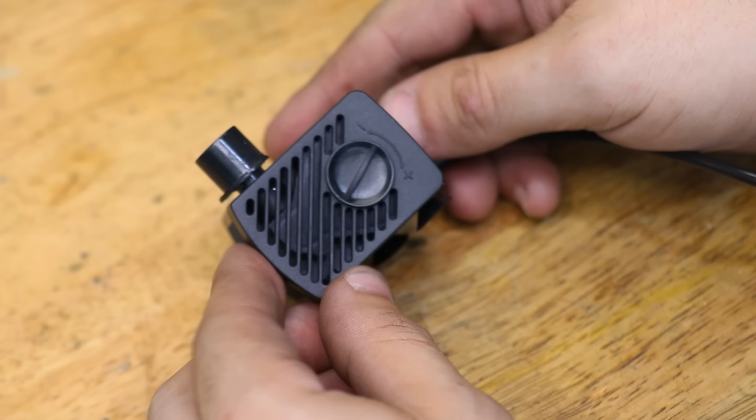So I'm currently in the market for a pump, an oil pump to be precise, and I know what you're going to say - isn't that a pump right there? One that's already good to go, already made, and doesn't need any machining. And the answer is yes, but A, that would be too easy, and also it's not really the correct type of pump for what I want.

What this is, is some type of centrifugal pump. Inside here there's going to be an impeller which spins very fast, and whilst this is great at getting high flow rates, they aren't really as suited for dealing with higher pressures, which is sort of what I'm looking at. I mean, nothing too big, but I don't think that this is the pump for the job.

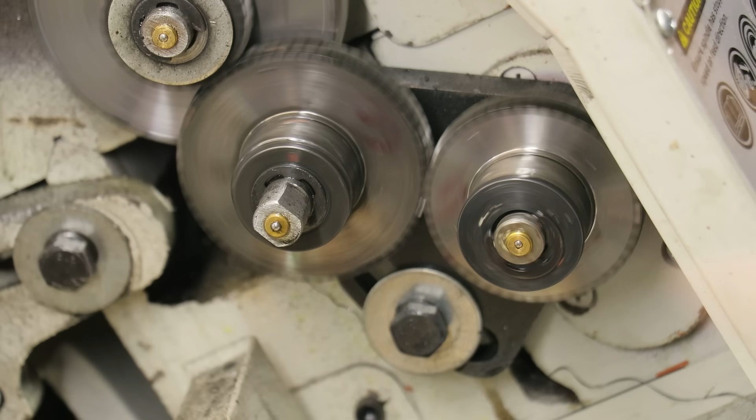Now of course this is not a pump, it's the gear train on the back of the lathe that connects the two gearboxes together. But with a bit of repackaging, this is pretty much the exact same setup as a pump, a gear pump. And if you weren't already aware of them, these pumps are incredibly common, especially in hydraulics. And for what I need, it really does tick all the boxes. It's good for moving thicker oils, which is what I'm going to be using this for.

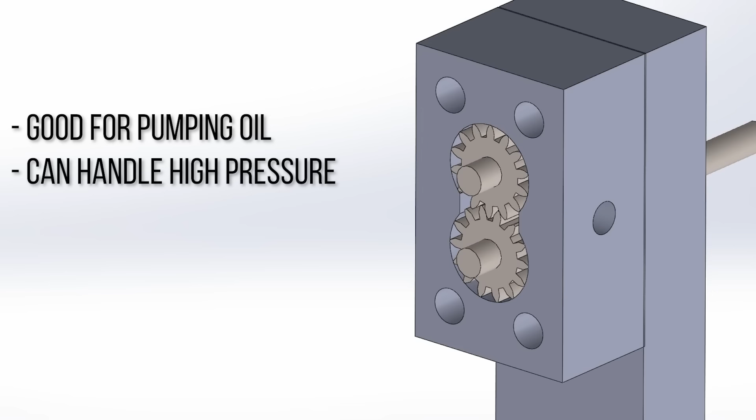They do well under pressure. They run on rotational motion, which is good for powering this, and they're relatively simple to make. And I really do mean it. I mean, pumps in general aren't that complicated, but this one here is pretty simple. It's effectively two gears seated in a pair of bushings inside a housing with an outlet and an inlet, plus some sort of way to drive one of the gears, which will in turn drive the other.

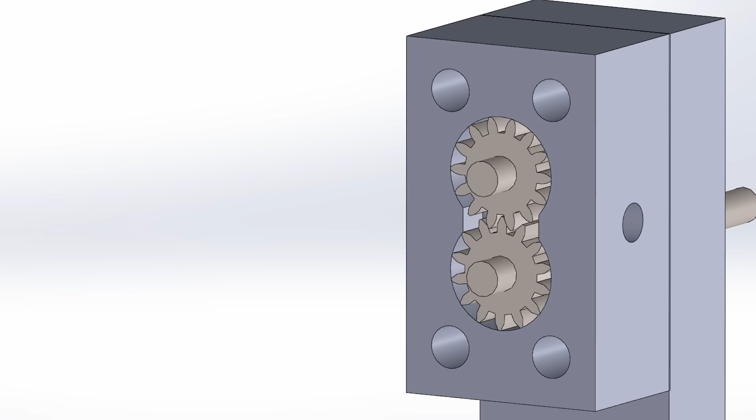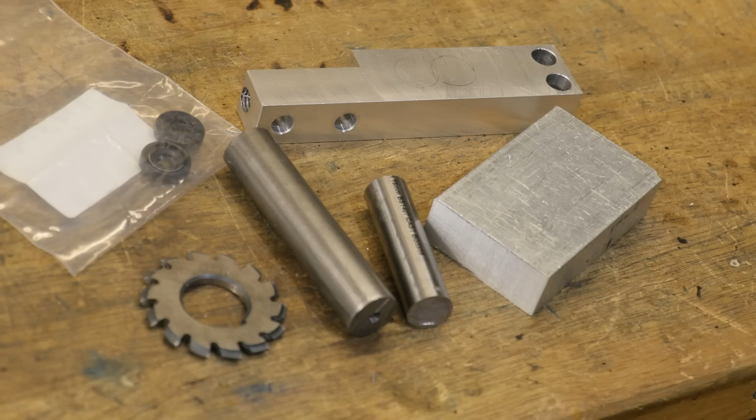I guess for me it's a little bit less straightforward because this is one of those projects where I would really benefit from having a CNC machine to make some of the parts, especially the bearing blocks, but unfortunately I just don't have one. So that's one thing I will have to worry about, but in general they are pretty simple to make. Now in terms of materials and tools, I'm kind of working with what I got, which here really isn't a lot.

I've got some aluminium offcuts which will serve as the pump housing, and in a perfect world these would have been a little bit thicker. If they were, I could have done this in two sections, just a top and a bottom, but instead I am going to have to do this in three. Which should be okay, we should be able to make it work, but it's more of a chance for things not to align correctly, and more of a chance for it to leak.

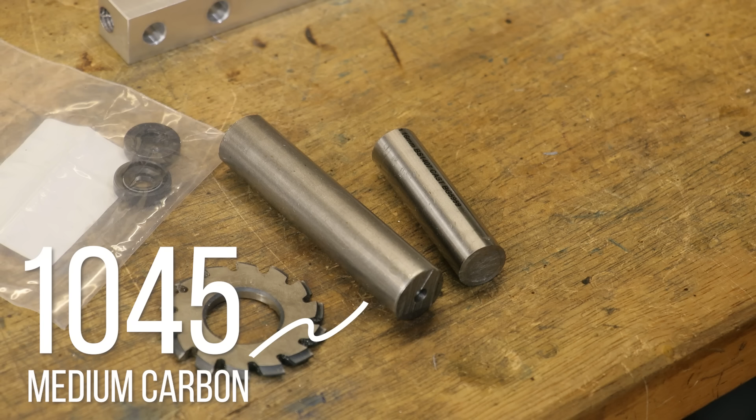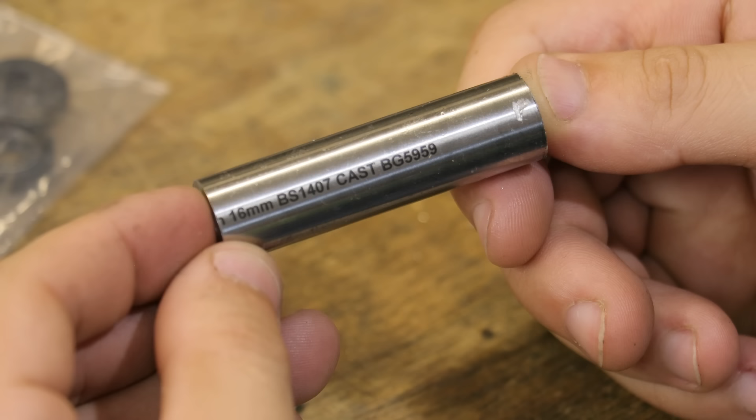Now for the gears and the parts that are going to receive a bit of wear, I'm going to instead make them from steel - 1045 medium carbon for the gears, and high carbon tool steel for the plain bearings and the wear surfaces. I will say ahead of time that I would have rather used bronze or maybe a PTFE bushing, but I think steel should be okay, plus I already had it on hand. It also helps here that this is precision ground, which will be pretty useful further on in the build.

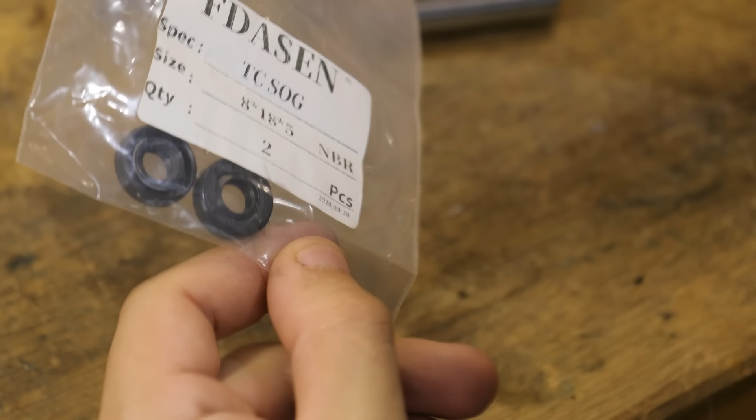I also have a 14 to 16 teeth gear cutter because the gears that I'm going to be making are pretty small, and most importantly I have a set of shaft lip seals. As you can probably imagine, one of the gears needs a drive shaft that sticks all the way through the housing so I can drive it, and the lip seal should prevent any oil from leaking out.

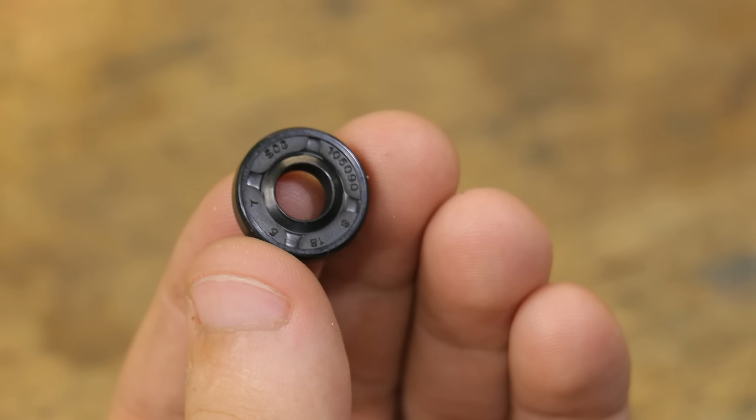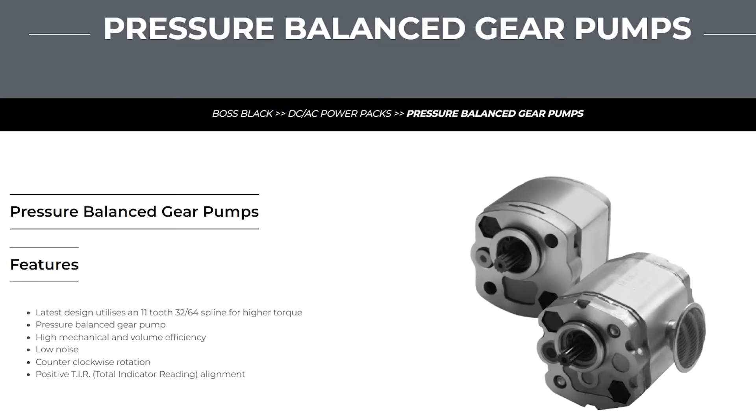These should be good to about 10 bar of pressure, and thankfully, whilst we are going to receive a bit of pressure, it's not going to be anywhere near that. At most, I think we should get about 20 to 30 psi. Although with that said, these pumps, or at least a properly designed one, should be able to handle anywhere from 2 to 3000 psi, which is why you commonly find them on hydraulic systems.

Although it needs to be said that pumps that are intended for that need internal seals on the bearing blocks, and also need pressure relief channels for diverting fluid to avoid overpressurizing the pump and causing damage.

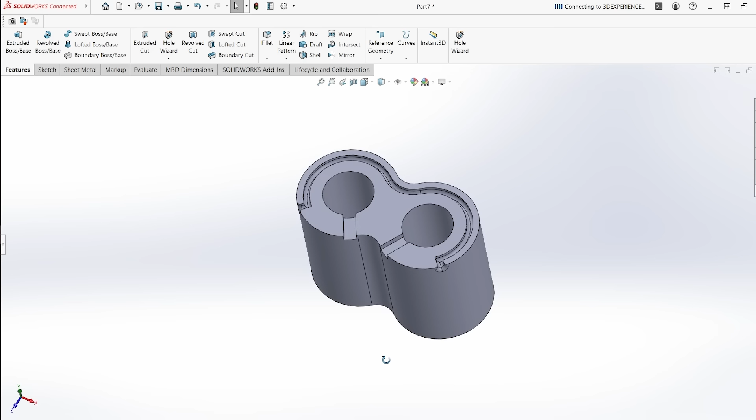Mine obviously isn't going to have anything like that because we aren't going to see anything close to those sort of pressures. So if you've opened one of these before and you're wondering why mine won't look exactly the same as yours, that's probably why.

For what it's worth, I can say up front that with this project I can take it easy, because with this pump, flow rate and efficiency really don't matter a whole lot. All I really need is a pump that works and doesn't leak. In fact, apart from a few documents and reference material, I was kind of making up the exact dimensions as I went along, so don't expect this to be optimal in any way because it really wasn't. With that said though, precision is going to be important here, and no matter the dimension, the parts will need to be made extremely accurately.

So let's jump in and let's get it made. The first thing we'll tackle are the gears. They're going to be made the same size as the bushings, so they're each going to get 14 teeth, which will equal 16mm OD.

I'll take the steel down to 16mm and also make a small shaft on the end, which will locate into the bushing. With the first side now roughed out, I'll get it out of the lathe and into the dividing head to cut the gear teeth.

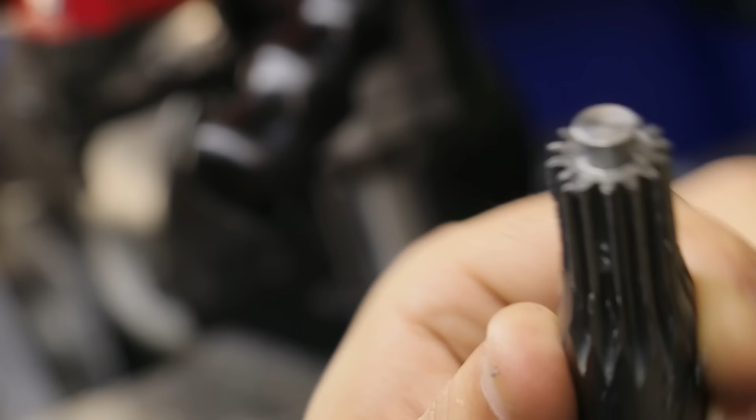And that came out looking pretty good. I'll then get it back in the lathe and part it off, so I can then flip it, clean it up, and then machine the shaft on the other side.

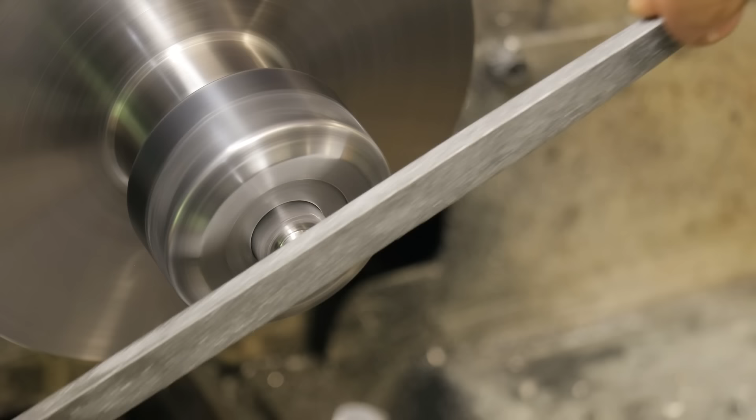And that is the first gear now done. This is going to be the driven gear. Now the driving gear is going to be made the exact same way, although it does need a longer shaft to be made on one side, and that'll be so I can connect it to a pulley.

And those are the two gears now done. I now start to work on the plain bearings, which is relatively straightforward, since the outside is already precision ground to the size that I need. So all I really need to do now is drill the inside to 19/64 of an inch, which is a bit over 7.5mm, and then ream it to 8mm.

I'll then come and part them off a bit over 5mm long, and then I can take them down to the correct size later on. And that's 1, 2, 3, and 4. They have a really good fit on the gear shafts, and this is roughly how they'll look once they're assembled.

Now, as you can probably see, the high carbon steel bushings and the outside of the gears are going to be our main wear surfaces. And whilst all these parts can be hardened, whether or not I do harden them is going to be up in the air, because the truth is I don't expect them to see a whole lot of load or wear during use, mostly because we're only moving a small amount of oil, which shouldn't take a whole lot of force, and when this is in use it's going to be flooded with oil, so I can't imagine it's going to be experiencing a whole lot of wear.

But if I really need to, I can always harden it at a later date. With that said, they're still not done yet. Parting them off left a pretty big burr, and that needs to be removed. They also need 1mm taken off one side to form a flat, and this will move the gears closer to each other so they can mesh.

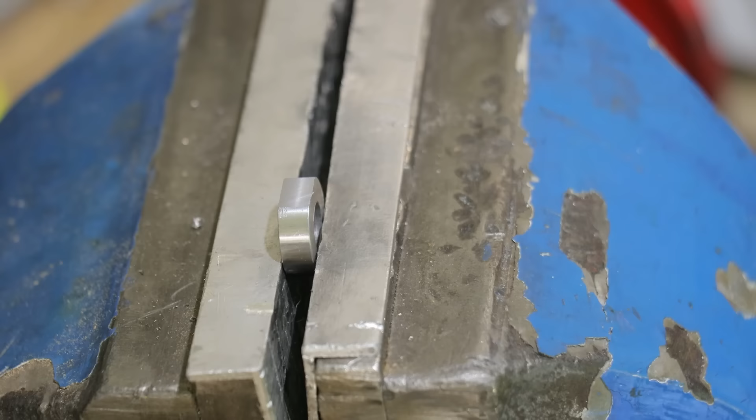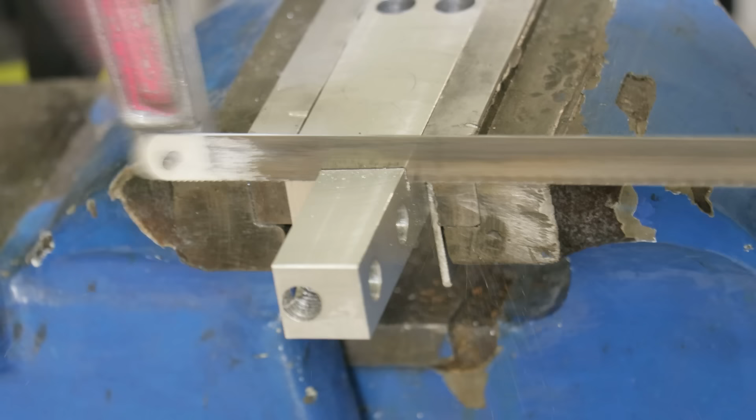Now this should give you a pretty good idea of how they're going to sit in the housing. As you can probably see, this is a pretty good substitute for a bearing block when you don't have access to a CNC or a rotary table. So with the gears and the bushings now done, let's start on the housings. Again, it's all aluminium offcuts, so I'll first get them cut down and then cleaned up.

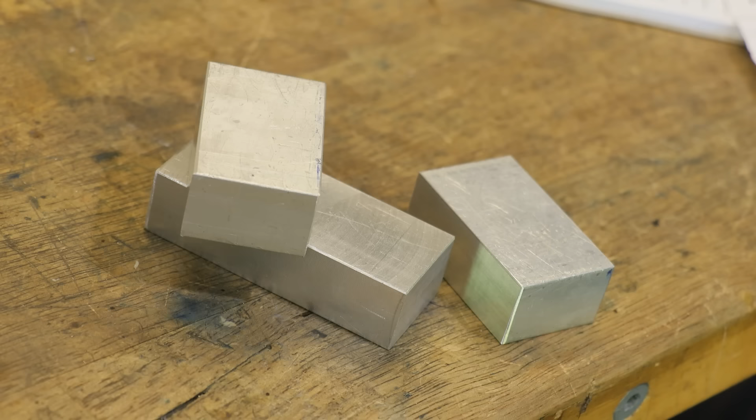And that's the aluminium pieces now cleaned up. The big one is going to be the base, which will feature holes for mounting it, and the two smaller ones will be for the gear housing and the top cover plate. So the first thing I'll tackle is the base.

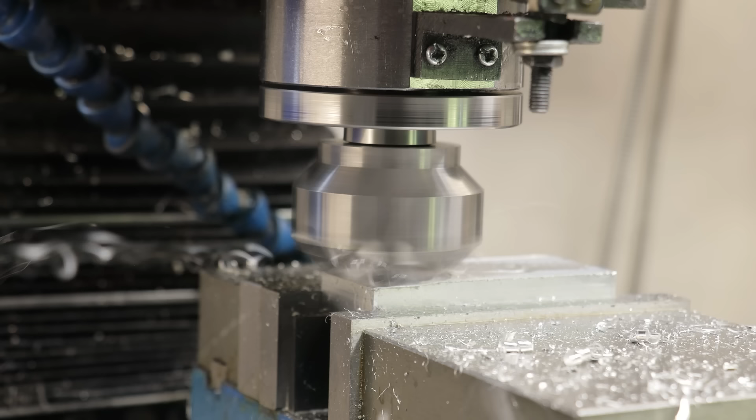Now where I'm going to eventually place the motor is going to be a bit limited in height, so I am going to take a bit of material off the top. I'll then come in and drill some mounting holes.

I'll then swap out the drill for an end mill, because what I want to do is create two flat bottom holes, and plunging in with an end mill creates an almost flat bottom. Flat enough for what I need here.

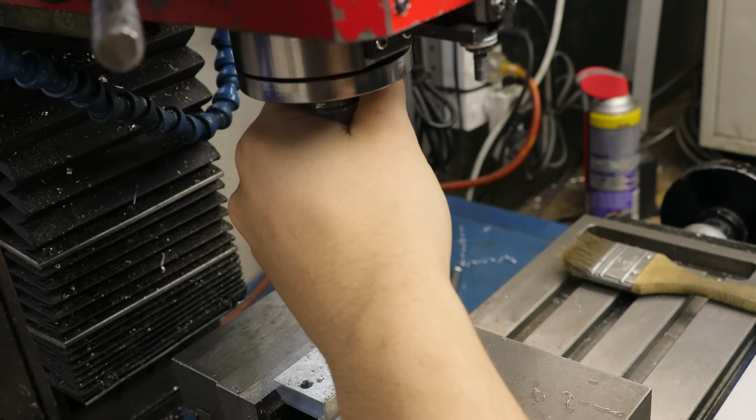I'll then swap it with a boring head and take it to its final size. This is one feature that needs to be done extremely accurately. What I want is a nice transitional fit between the bearings and the housing, and because I started off the bearings using ground stock, I know the outside diameter is exactly 16mm. So I'm going to be aiming for a hole that is about 10 to 20 microns under that. So I guess no pressure.

Alright, so that is just under what I need. I think I'll dial in a tiny bit more and that should be just perfect. And that looks to be pretty much spot on. I'm not going to push it in all the way to test it, because if I do, I probably won't be able to get it out, and I still have the other one to do. So what I'll do now is do the other one, and then hopefully it should all fit.

And once again, that is a really good fit. The last thing to do on this side is going to be to make the mounting holes. Now the way that I'm going to try and make this all work is that I'm going to use the screws to hold everything together, but at the same time the screws are also going to be used as locating pins to help keep all three parts aligned.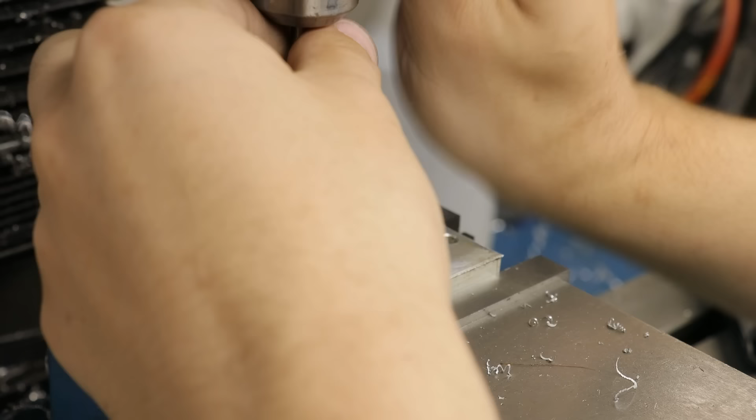So to make this work, I'll start by drilling part way with a 5.5mm drill, and then follow it up with a 5mm drill. The top half will get reamed to exactly 6mm, and the bottom will then get tapped for M6. I can then do that 3 more times, and then get it flipped over.

Okay, so as you probably did notice, I did change the part just a little bit, in that I had to rebuild it. Long story short, the original mounting holes that I had made would have made everything a lot more difficult come time to actually mounting this in place. Plus, upon remeasuring it, I also realised that it didn't need to be this thin, so I was able to make it and the threads a little bit longer. I've also gone ahead and drilled a hole all the way through for the shaft.

It's also worth saying that which gear you choose to drive, and the direction that you are driving this from, is going to change the direction of the pump. And we can get into that a little bit later.

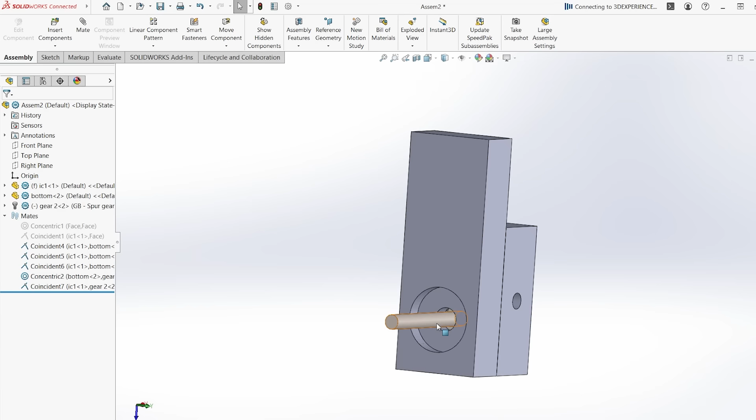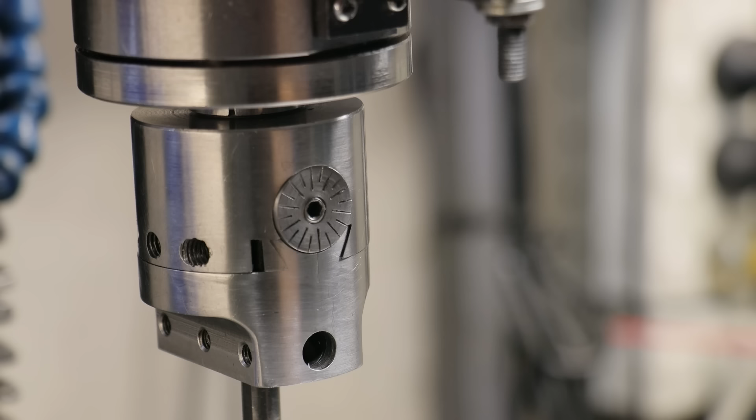Now the final thing that I need to do on the base is to make a counterbore for the shaft seal. There were a few different styles that I could have gone for, but this style of lip seal is probably the most basic that I could have gone for. It simply mounts at the outside and it's held in place through friction. That is at least the plan, as long as I get the counterbore right.

The datasheet here specifies a hole tolerance of 22 microns, which is not impossible, but it's very easy to go over if you're not careful. And unfortunately, I don't have any spare aluminium to work with if I get this wrong.

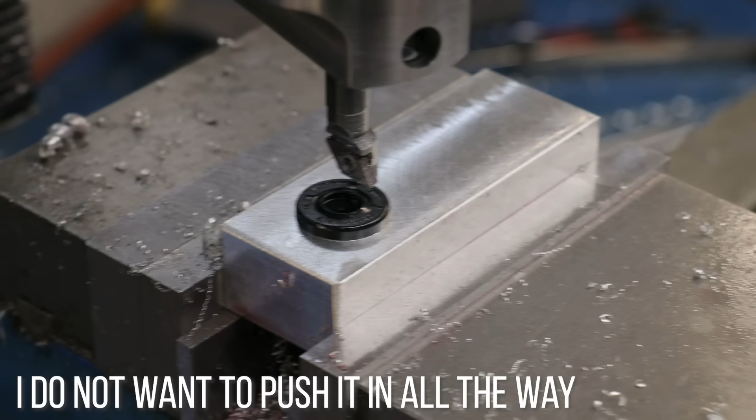And thankfully, that is pretty much spot on. I'll now get the part and give it a wash in degreaser to remove any grease and chips, and then I'll leave it out to dry.

Now the top piece is going to be made in a very similar way, although it is smaller and thinner. It also gets 4 holes drilled all the way through for the alignment pins. And the bores for the bearings also need to be made just as accurately as they were beforehand.

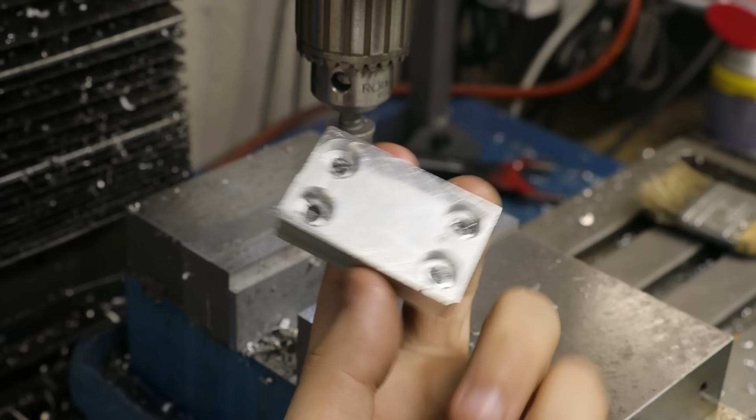Now the last big thing that we need to make is the housing for the gears. It's mostly the same process as before, except the holes go all the way through the block.

Now this time, instead of being right on 16mm, what I want is to take it a little bit over to about 16.1. Doing this should give us a gap or spacing between the gear and the housing of about 50 microns, which is roughly the width of a human hair. Ideally, we would want it to be as tight as possible without it rubbing, and I think 50 microns is a pretty good target.

And with the first hole now done, you can now see how great the fit is with the gear and the housing. That is pretty much perfect.

With the second hole now done, I'll then come in with an end mill and mill a flat on each side in the spacing between the two bores. Doing this should help create a bit of space for the fluid to move from the gear teeth and into the nozzle.

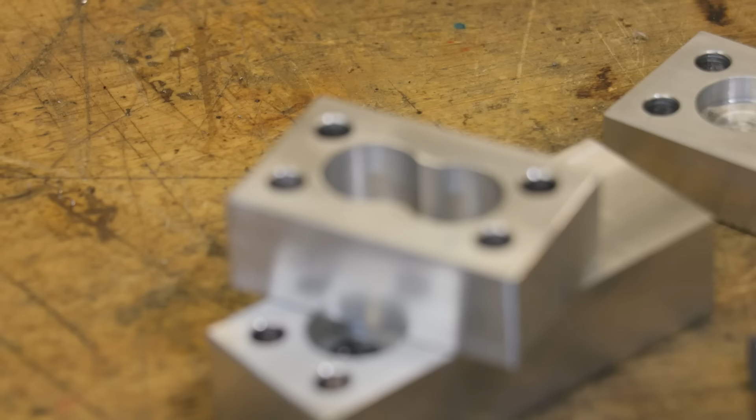Alright, and that's the three parts that make up the pump body now done. Now before I do a quick test fit, I need to make up the 4 screw pins that will hold and locate everything together.

Now the main thing that is important here is that the pin part is accurately turned down to exactly 6mm. Anything smaller than that and it won't properly align the parts.

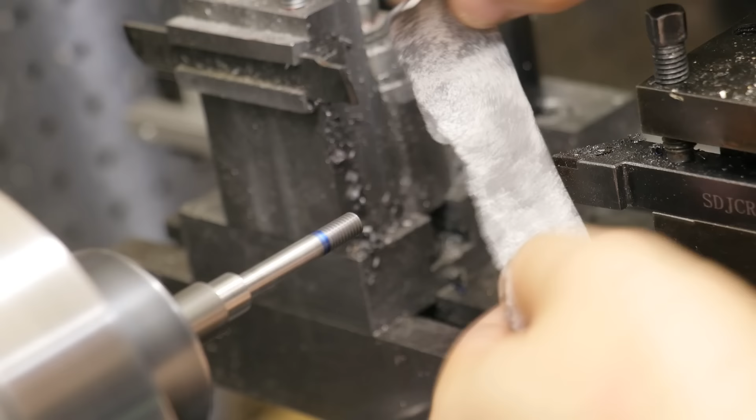Now I probably should explain, I recently shattered my slitting saw blade and I don't currently have a replacement, so to make the slot I'll use a 2mm end mill, crank the RPM up and hope that it doesn't break.

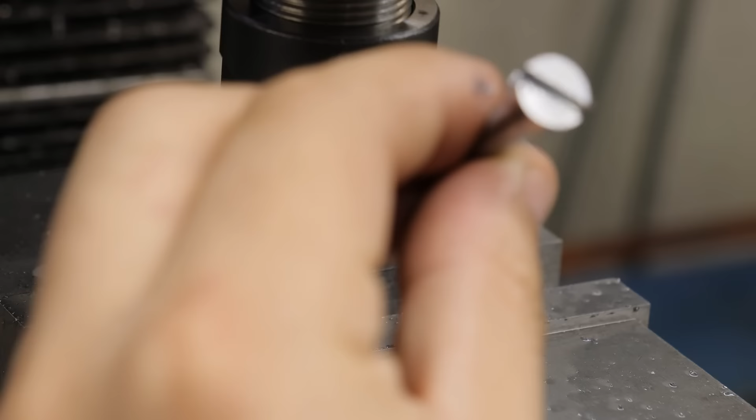Alright, and I think they came out looking pretty good. And that is most of the parts now done for the moment.

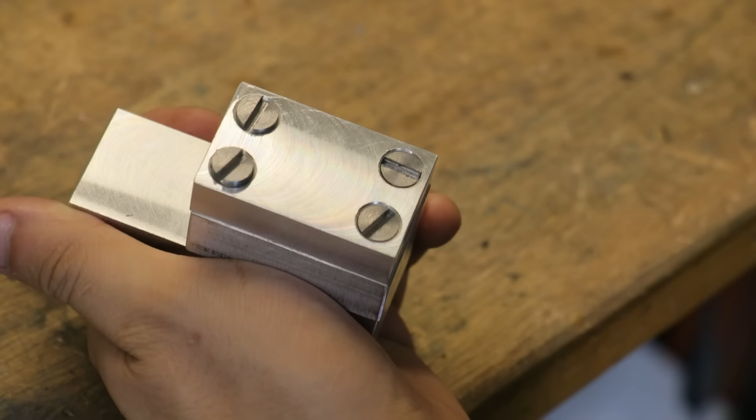Now I'm currently doing a quick test fit just to make sure that everything fits together nicely, and so far I'm pretty happy with how it's all come out. Everything fits well and it slides pretty nicely. Honestly, it's all going a lot better than I thought it would.

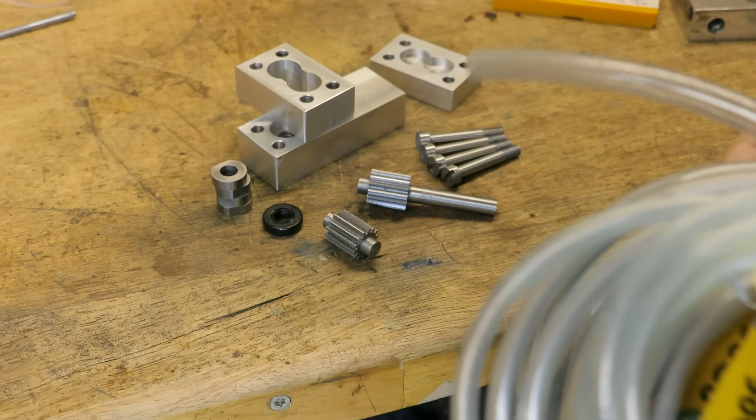So what I need to do now is make an inlet and an outlet for the pump housing. Now as it is at the moment, I haven't settled on exactly what tubing I'll use in the end, and I don't currently have a whole lot on hand. In fact, all I really have is some 8, 3 and 5mm vinyl tubing.

I think it's rated to about 40 psi, which in hindsight is probably more than enough. But at least for testing, I'm going to settle on 5mm, and if I need to go bigger, I can always do that if I need to. So the first thing I'll do is I'll get the inlets drilled and tapped.

I'll also go ahead and get 2 hose connectors made up. Now initially I was going to go for brass, but unfortunately I don't have any, so aluminium will do, at least for now.

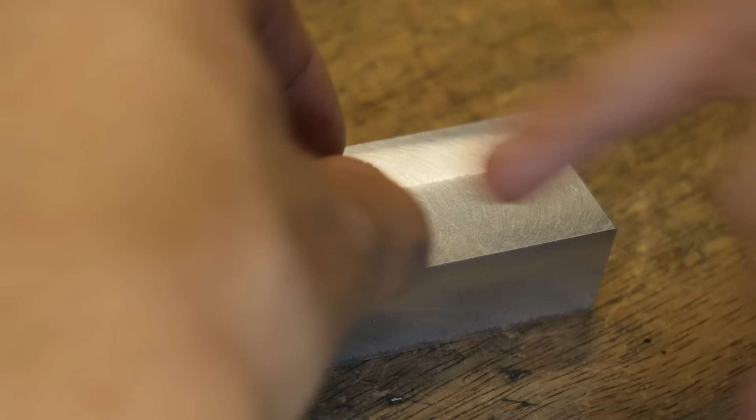And with that now done, let's go ahead and get it assembled. Now as I mentioned before, the bearings were made to be a little bit long, so I had to take them to the mill and get about 0.1mm taken off the end, just so they would fit correctly in the housing.

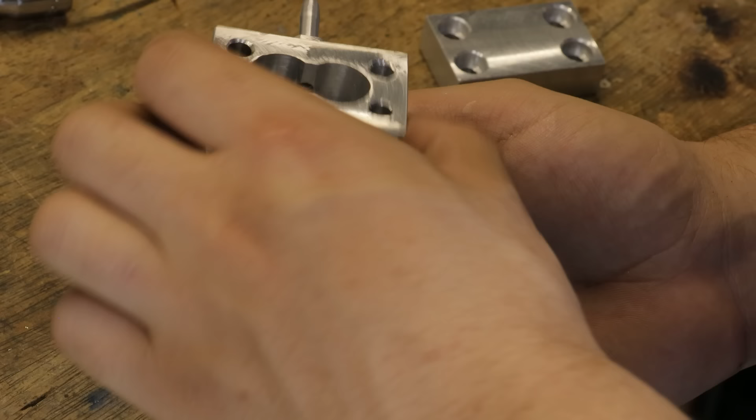I also could have sworn that I had some gasket paper lying around the workshop, but as it turned out, I didn't. So at least in a pinch, I'm going to make one up from some printer paper, and let's just try and see if it works.

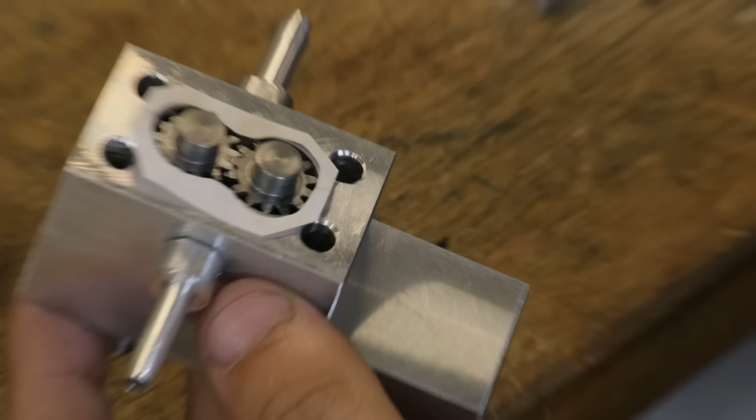And once the top is put on and it's all screwed together, that is the pump now done. I know it's pretty basic and not the best thing to look at, but the real question is, does it work? So let's go ahead and find out.

Now for testing, I'm simply going to drive it off a battery drill, and the fluid that I'll use is some engine oil, which is very similar to the oil that this will be pumping.

Now I've got to say, on the first go, it wasn't off to a great start. As it wasn't the greatest at self-priming, but once I started to prime it with a bit of oil, it started to work quite well. It wasn't perfect, but the important thing is that it was pumping.

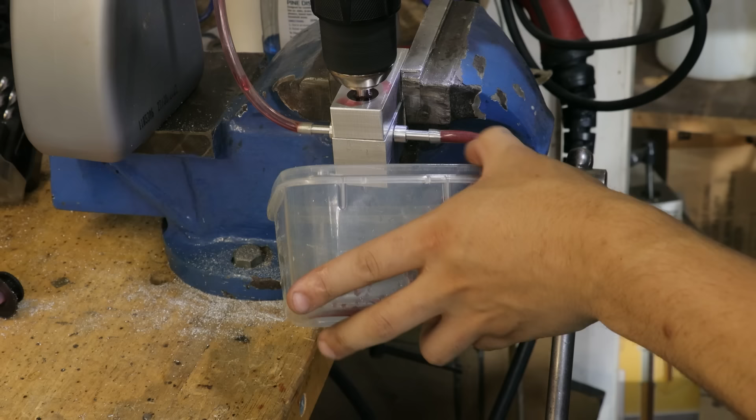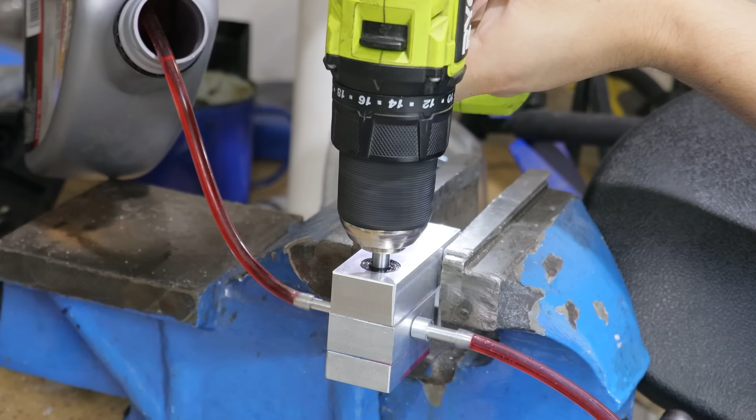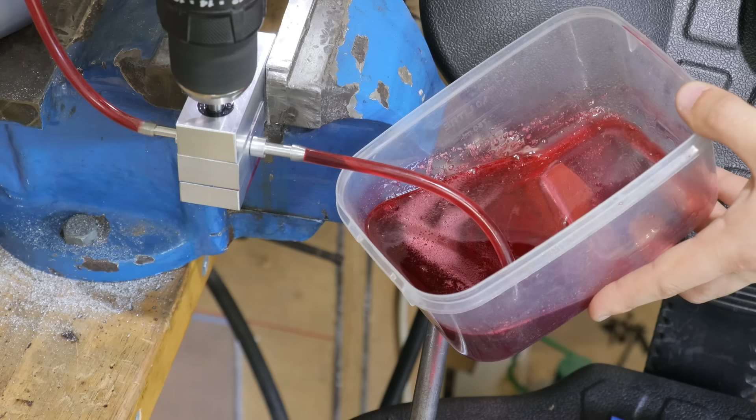Now initially the biggest problem was that we weren't getting a whole lot of suction, and we were getting a lot of air bubbles mixing in with the oil, which probably indicates a leak somewhere. Thankfully, I was able to tighten the screws a little bit more, and that seemed to fix most of the problems. As it is at the moment, it's doing a really good job at pumping oil to and from each container. So at least for my first attempt, I think this is a pretty good starting point.

Now at this point I think it's worth explaining how a gear pump like this works, because it may not work in the way that you think it does. You may initially think that the gear teeth will pull the liquid through the middle, through the gear teeth, and then spit it out the other side.

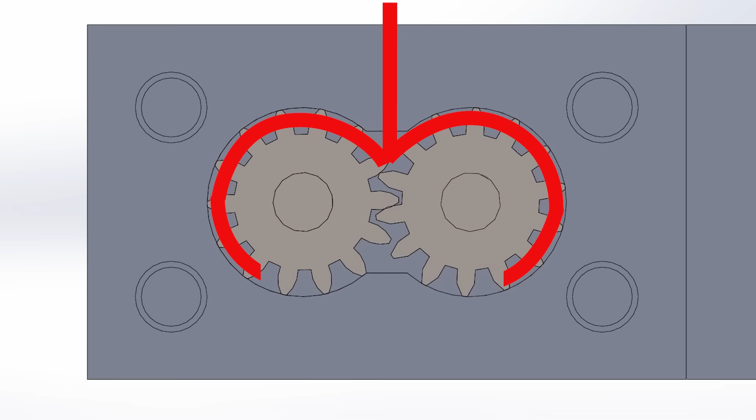But what is actually happening is that the oil is being pulled around the outside, trapped in the space between the gear teeth and sealed off by the housing wall. Once it's on the other side, it's unable to move through the centre of the two gear teeth, so instead it needs to go through the outlet. This is the reason why the spacing between the outside of the gear teeth and the housing wall had to be as small as possible. The larger the gap, the more leaking of oil you'll get, and the pump will become less efficient.

Now at this point, I am 95% of the way there, but as it is at the moment, I really can't finish the project until it works pretty much flawlessly. Because once I get this pump installed, I want this to work for years and years without any issues. So the first thing I'll do is clean up the outside just to make it a little bit more presentable.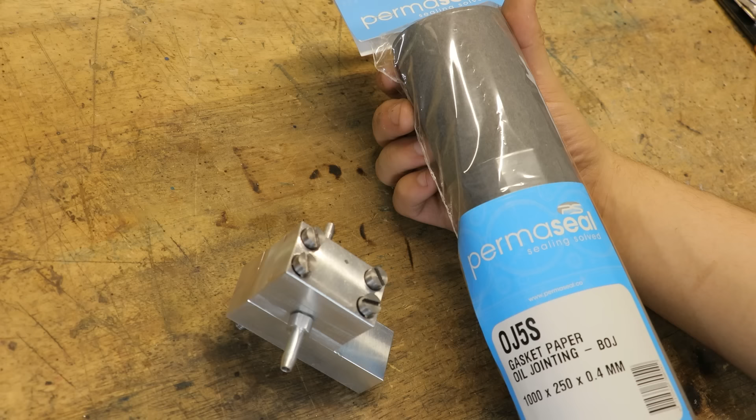Secondly, as you could probably imagine, the paper gaskets that I made didn't really do a good job, as probably indicated from the air bubbles forming in the oil and the leaking oil out the side. So I've gone ahead and bought some proper gasket paper, and this time I'll do a much better job at cutting it out to fit properly.

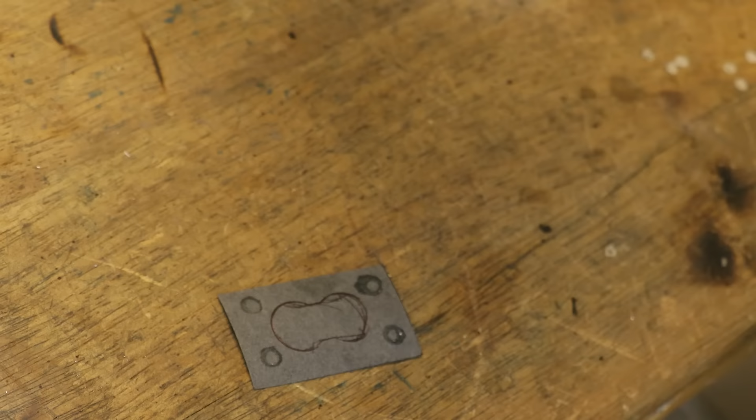And yeah, that is going to be a much better fit. I've also come in and added a reverse countersink to the inlet and the outlet to help the oil flow out and flow in a little bit better. I have seen another person do this and it seemed to work. I could also come in and reverse counterbore it, which I think is somewhat common on these pumps, but unfortunately the hole I'm working with is only about 5mm big, and I don't really have any cutting tools that could do the job.

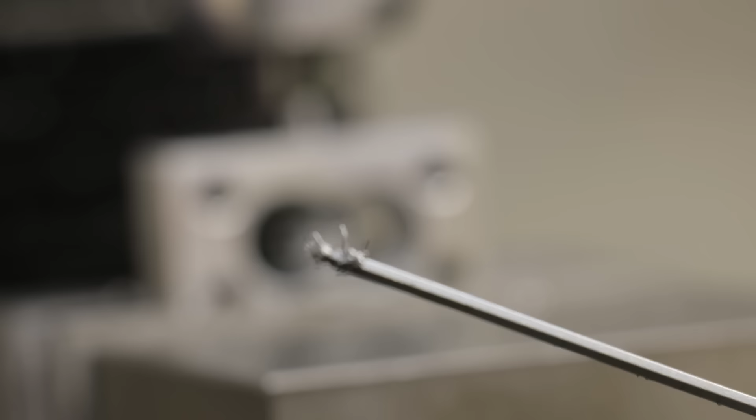And with the pump now back together and running, it is certainly a huge improvement over where it was before. We're getting a much better flow of oil and practically no issues with air bubbles forming in the oil. Also no leaks whatsoever, so the new gaskets and the lip seal are working perfectly.

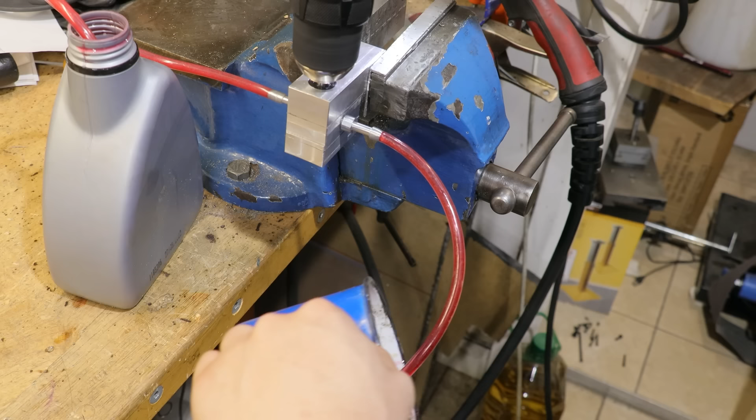Now as it is at the moment, I'm running it at about 1200 RPM and it's only doing about 300 to 400 ml of oil per minute at the very most, which really is not a lot. Now this is not a problem with the pump design, it really is a restriction that is based on the inlet housing, which is only about 4mm big. I am more than certain that with bigger tubing, we will be able to get a much higher flow rate. Now whether or not I'll change it will remain to be seen.

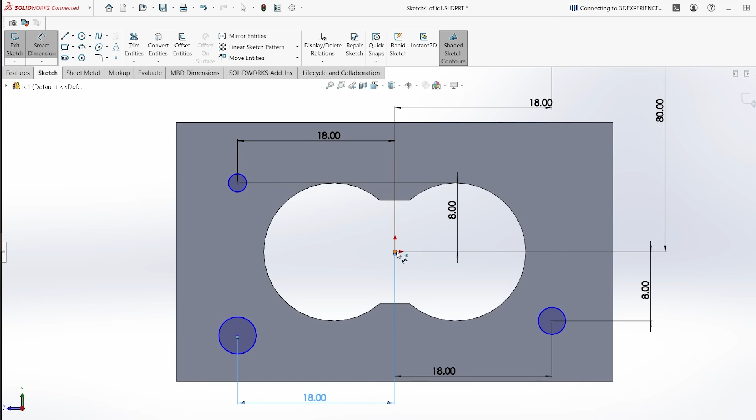Again, all I really need from it is for it to just work. Efficiency and pump speed really weren't a part of the design, which again, I mostly made up as I went along. I only recently got my SolidWorks license back, so all the CAD work was done after the project. And for what it's worth, I don't have the flow sim anymore, so even if I did design it in CAD, doing a flow sim on this would have been out of the question.

All this is to say is that I wouldn't use this as a good example of great pump design. It's a pump design that works, and one that will work for me, but it probably isn't the most efficient example out there. But the important thing again is that it works. Or at least we will see if it works when it comes time to putting this to good use. And that'll be at a later date.